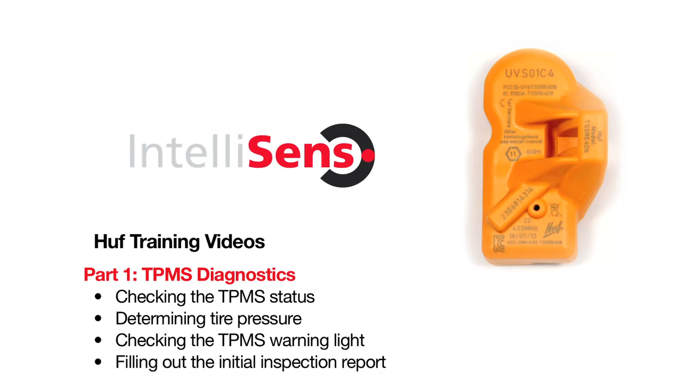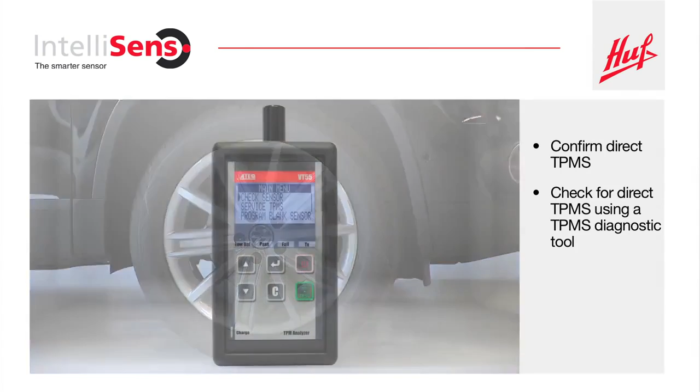First, confirm that the vehicle is equipped with a direct tire pressure monitoring system, or TPMS. The quickest way to check for a direct TPMS system is to use the trigger function of your TPMS diagnostic tool. First, enter the vehicle data into the tool you are using. The tool will tell you which tire you should trigger first.

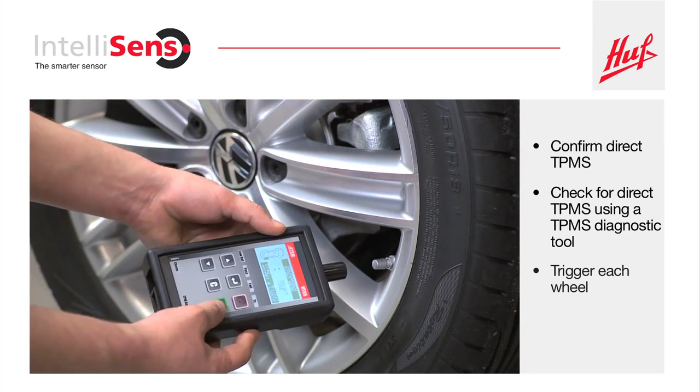Hold the tool as close as possible to the valve of that tire and push the trigger button. Continue to the next tire specified by the tool.

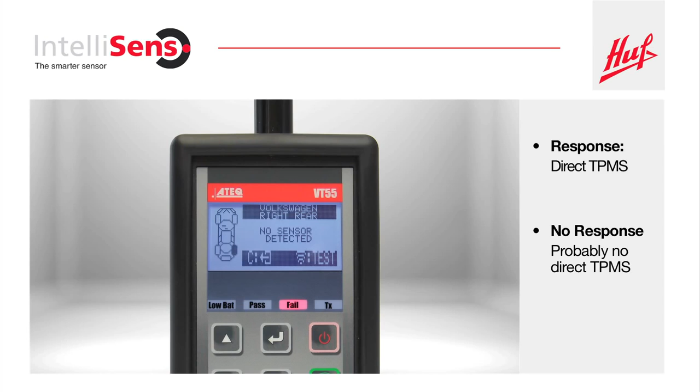If the tool receives at least one response, the vehicle is equipped with direct TPMS. If there is no response from one tire, the TPMS sensor in that tire is likely broken. If the tool receives no response from any of the 4 tires, the vehicle is probably not equipped with direct TPMS. If in doubt, you can double-check by breaking loose the bead of the tire from the rim near the valve to see if there is a sensor installed.

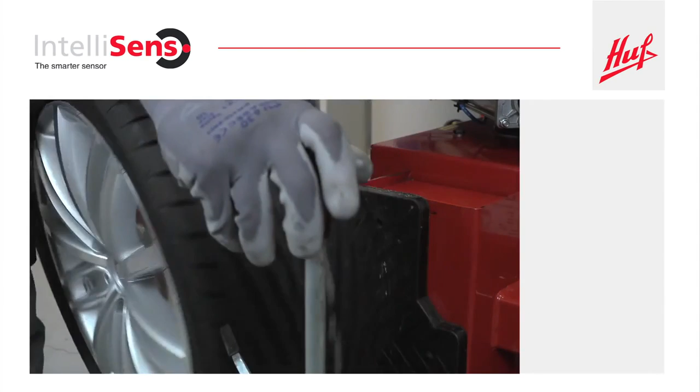If the tool responds, the sensor ID and tire pressure level will be automatically stored in your TPMS diagnostic tool. Record the sensor ID and whether or not the sensor is functional or defective in the initial inspection report.

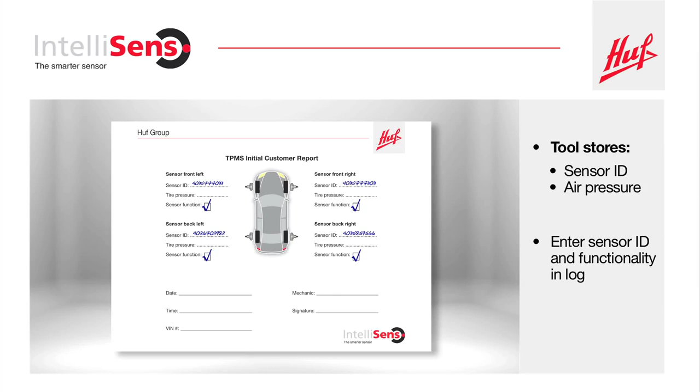Next, check the TPMS warning light in the dashboard. To do this, turn the ignition on and observe the TPMS light. If the TPMS warning light turns off with other dashboard lights, the sensor is functioning and the tire pressure is within acceptable range. If the light remains on, the pressure in at least one of the tires is outside of acceptable range.

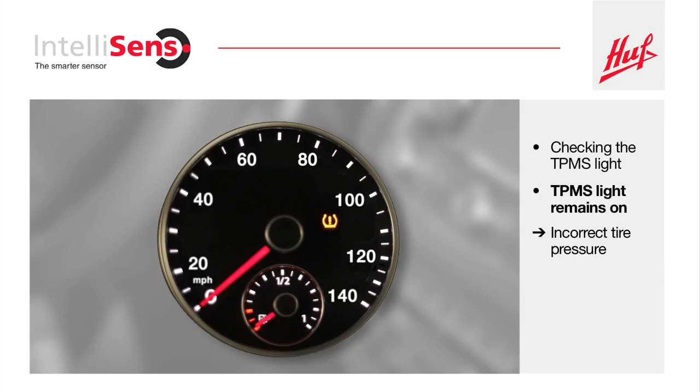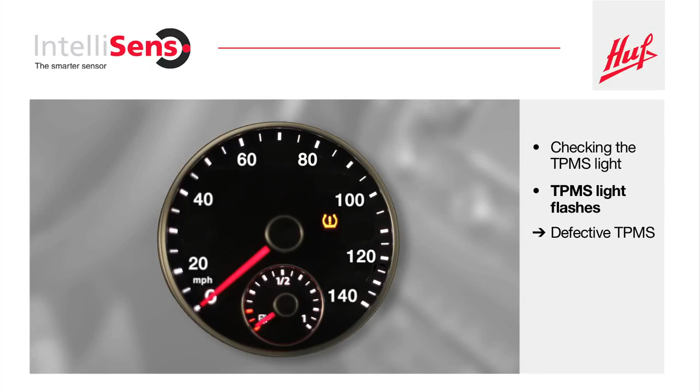If the light flashes first and then stays on permanently, at least one component of the TPMS is defective and should be replaced. Usually, this indicates a broken sensor. We will show you how to proceed in this situation in the next training video, configuring the Huf IntelliSens Universal Sensor. For now, continue with the remaining diagnostic steps.

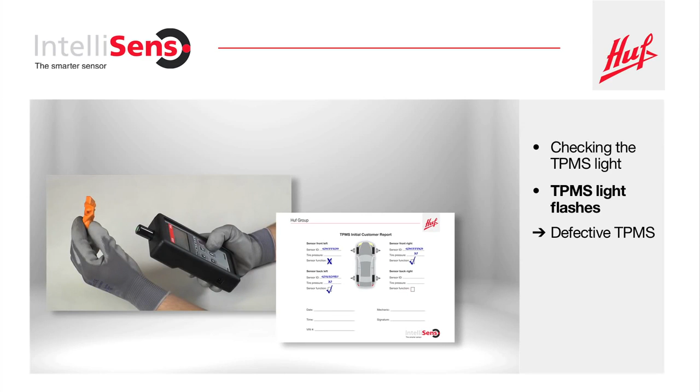If the pressure of at least one tire is out of range and there is also a defective sensor, the TPMS warning light will only indicate the defective sensor.

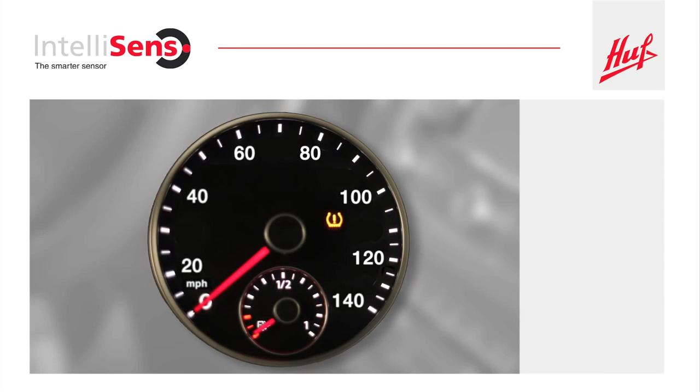Therefore, the next step should be to check the pressure of all the tires. To do this, recall the tire pressure values you stored in the TPMS diagnostic tool during the initial inspection and write them in the inspection report.

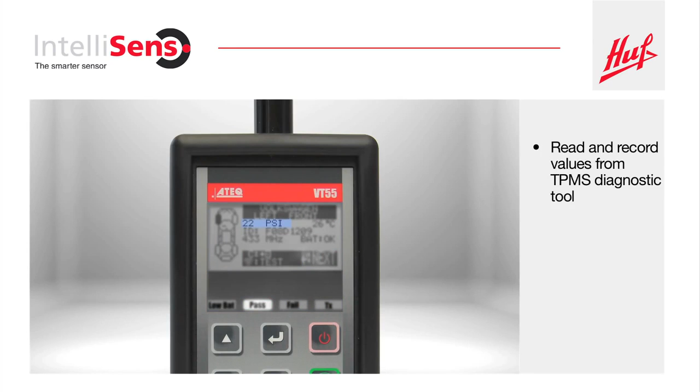If the pressure of at least one tire is out of the range, check the tire for physical damage. Repair any physical damage and then adjust the tire pressure.

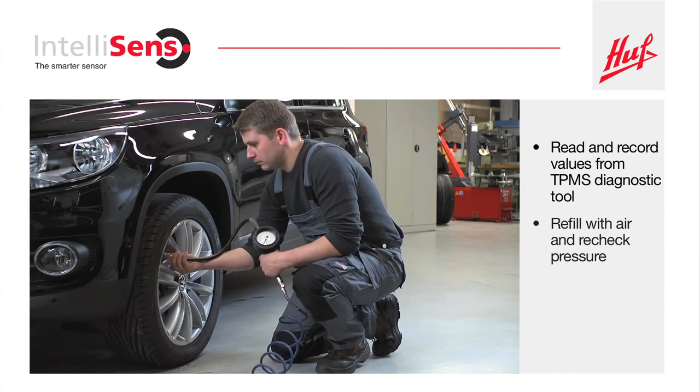Turn the vehicle ignition on again and trigger the sensor in the tire. Watch the TPMS dashboard warning light. If the tire has been correctly filled with pressure, the light will go out within a few seconds.

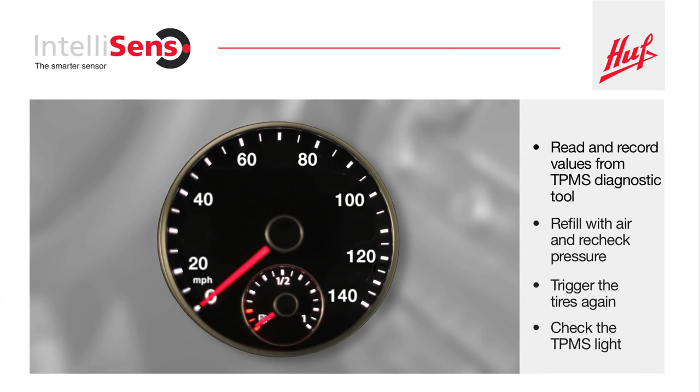If one or more sensors is broken and should be replaced, please continue with video 2, configuring the Huf IntelliSens Universal Sensor.